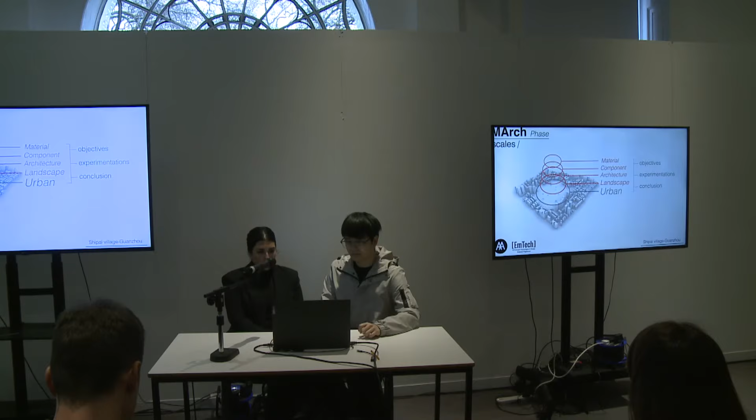Now in the MArch phase, the integrated system is introduced at more specific scales, starting with the urban scale. First of all, we removed all the poor quality buildings and kept only the buildings that had historical value.

The first way to insert agriculture was to use traditional agricultural farming, but we didn't have enough land for this purpose. Therefore, we decided to allocate only a number of desirable lands that receive appropriate sunlight hours as agricultural fields. Since traditional agriculture alone requires occupying a lot of land, we had to use modern agriculture methods to provide maximum residential space—a method that produces more products while occupying less land. This method is a type of vertical agriculture called hydroponic agriculture.

It only requires water, which is available in our climate. Therefore, collecting and storing water became our entry point for the formation of our urban strategies. In addition, due to material limitations and our commitment to sustainability, we avoided the construction of high-rise buildings.

Here are the urban objectives. In the first experiment, we ran a particle simulation on the mesh topography to analyze the flow of water across a surface. We reached several discrete curves, but the water collection system needs to be continuous.

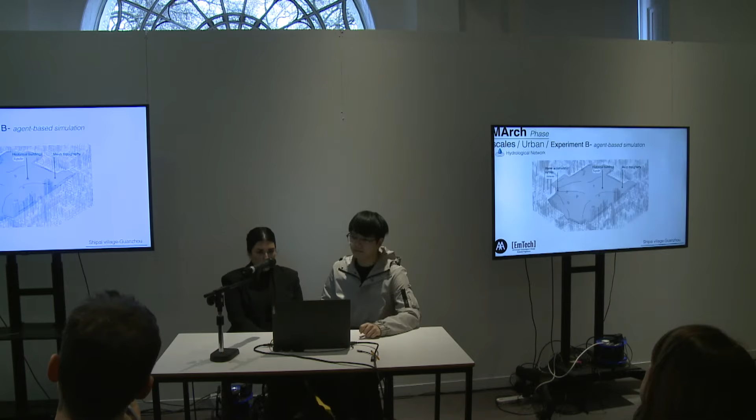Thus, in experiment B, in order to achieve a continuous water collection network, we ran an agent-based simulation with the random population of water particles on the topography mesh following the achieved curves from the previous stage. After reaching the result, we selected the edges that had stronger connections across the site. At the same time, they shaped a continuous network.

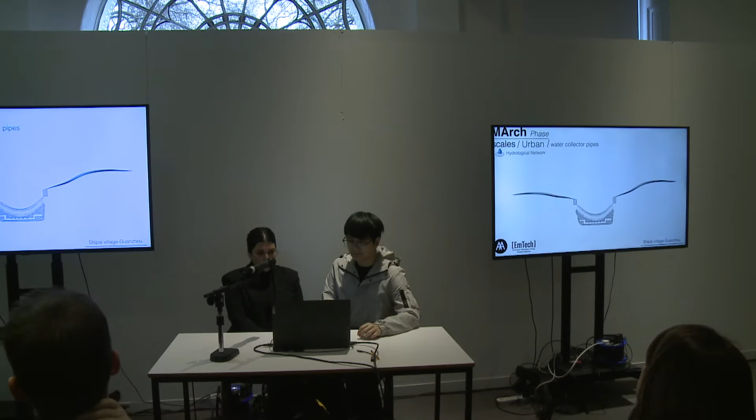In order to prevent water waste, permeable water collector pipes are located alongside the channel. In addition, designing an appropriate cross-section for the channels enables a better water navigation. For maximizing the water absorption, greeneries are defined across the channel.

In conclusion, the achieved hydro network divided the site into four main patches which shape the basis of defining other urban strategies. The achieved hydro network and its greenery spaces provide an appropriate platform to shape the pedestrian roads. Therefore, in this step, a design decision has been made to define the main pedestrian network parallel to the hydro network. In order to define the program allocation along the site, we did a terrain elevation mapping.

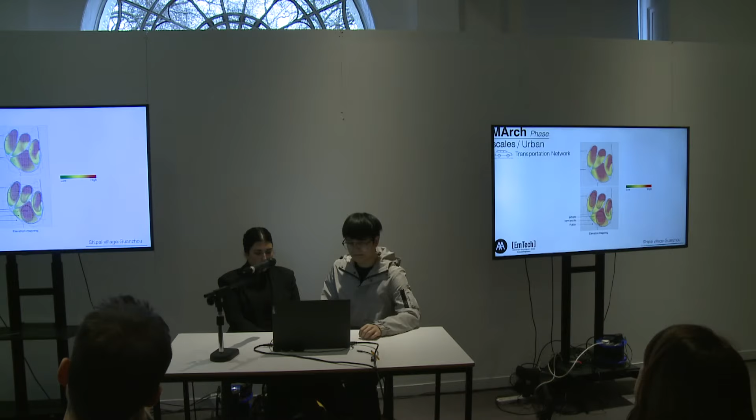This functional distribution brings the opportunity to define the transportation network in a circular arrangement inside each patch, which are connected to the important boundary streets and provide an appropriate accessibility to the site.

According to elevation mapping information, we selected the location of residential areas in high elevation parts for maximizing the view of the residential units, with semi-public functions and public spaces located from the center of each patch to the boundaries of the village respectively. These semi-public areas are mainly for hydroponic agriculture, and public areas are for public activities such as education, workshop, and leisure.

Landscape. The ambitions for designing the landscape or local scale are maximizing ventilation for a suitable response to hot and humid climates in hot seasons, spring and summer, maximizing appropriate sunlight hours for residential clustering in winter, and maximizing the amount of sunlight energy received in agricultural fields in winter.

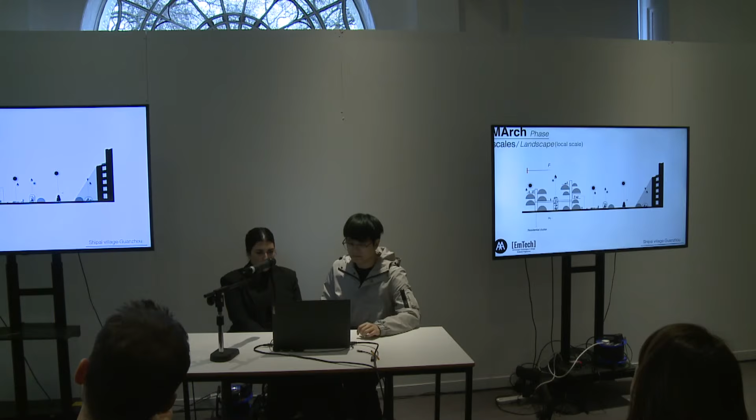In order to locate the programmatic functions on the local scale to achieve the mentioned objectives, it was important for us to define the morphology and aggregation of buildings including residential clusters, hydroponic agricultural buildings, and other public functions. Therefore, we set a GA optimization as our experimentation in this scale to optimize the landscape objectives.

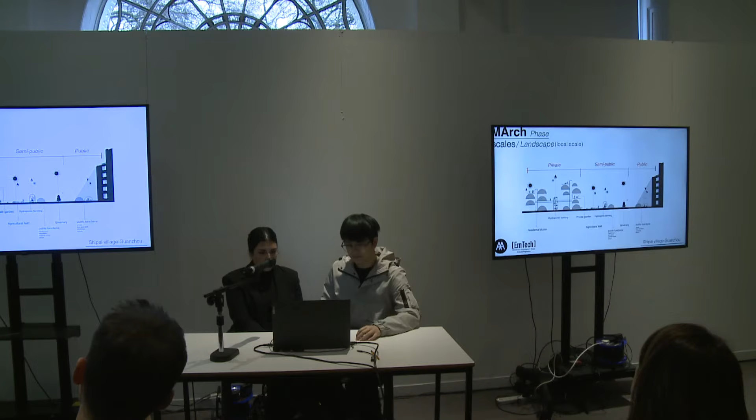As we investigated the traditional buildings in this region, we understood that the arrangement of mass and voids was circular due to environmental considerations. Therefore, with the help of a magnetic field tool, we set attractor and repeller points as our mass and void elements respectively. The next important step is to define the morphology of the mass in each zone.

100 generations, 50 individuals were run in the GA optimization. 50 Pareto solutions are selected from the individuals. Among them, individuals that met the average values in fitness criteria 1, 2, and 3 were selected as the basis for the following experimentations. At this stage of the work, with the information we had in progress from the rest of the project, we tried to draw a primitive picture of what we might reach at the end.

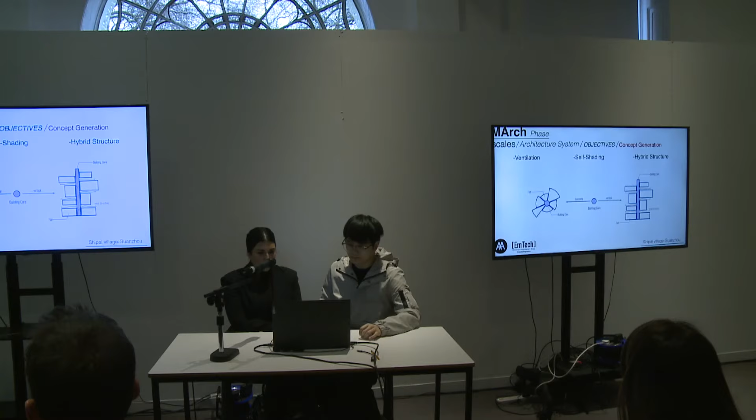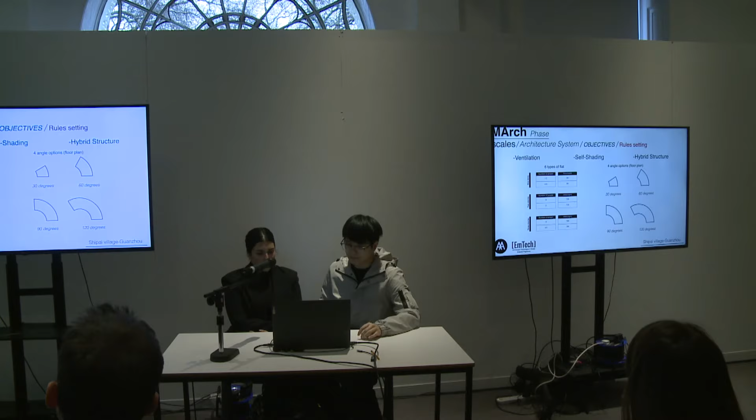After defining the basic concept, we did the overall frame structure of the building, with the columns and beams made entirely of timber. For the flat, we have summarized the 6 most common types of flats based on the fixed floor area and floor height. The angles of the flats varied between 30 degrees and 120 degrees in 30-degree intervals in order to fit the frame structure set in the previous step. Then we get the primitive geometry of the flat.

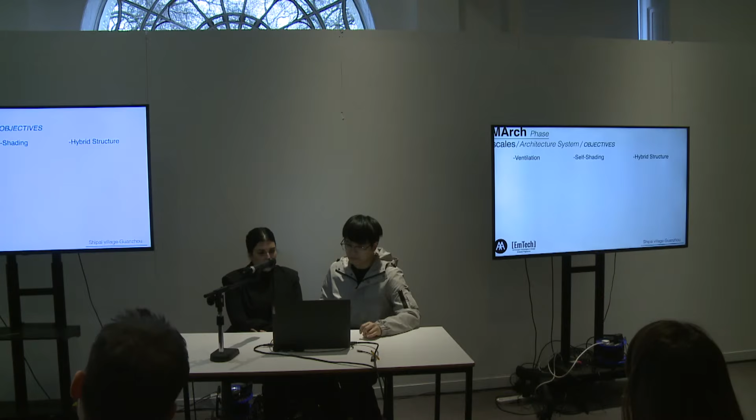For the morphology of the flats, we did form finding according to material and ventilation. The flats are mainly made of rammed earth, which is a typical compression-only structure. On the other hand, the Venturi effect was introduced to achieve natural ventilation. Based on these two aspects, we introduced the conical vault, which meets the needs of material and ventilation, and which can be understood as being formed by inner contour line and outer contour line.

In the next step, we run FEA on the 3 forms of vaults. By comparing the advantages and disadvantages for the inner contour line, we chose the third form of vault, where the forces on both sides will make the structure more stable, and for the outer contour line we chose the rounded board. So the morphology of the top of the flat is formed by these two types of the contour lines.

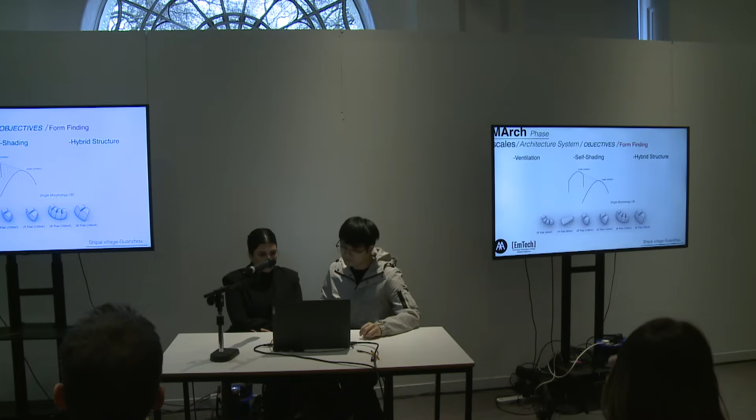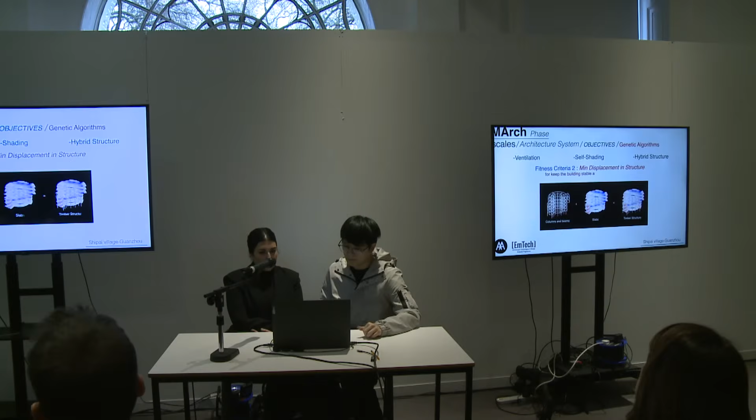In the aggregation setting, we set up two rules. One is all different types of the flats are interconnected around the core, and the other one is each flat is offset outward by a random distance. And the next step is the genetic algorithm. We have three fitness criteria. The first one is max self-shading in summer. The second one is minimum displacement in structure. The third one is max void space in the middle.

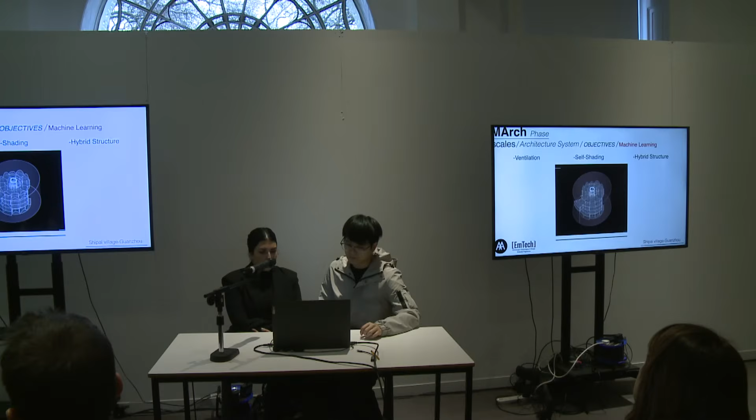After completing the genetic algorithm, we extracted the genes controlling the bounding box as the training input and used the other genes as the training output to perform the machine learning. In machine learning, by changing the bounding box, we get the corresponding building form. It provides us with a good start point. In the site analysis, we were given a number of such values. When we apply the machine learning to the site, it provides us with the specific building forms.

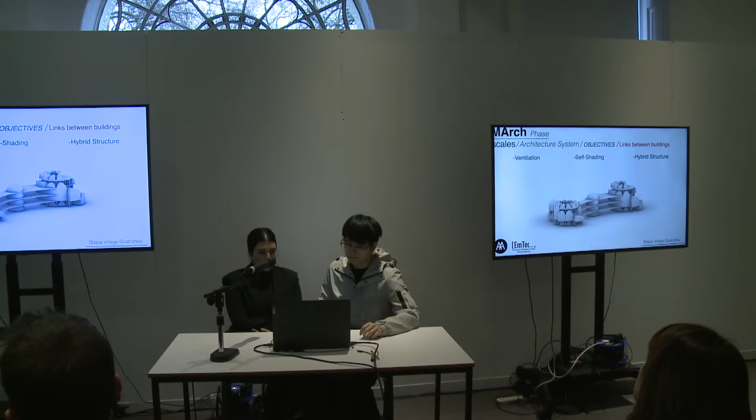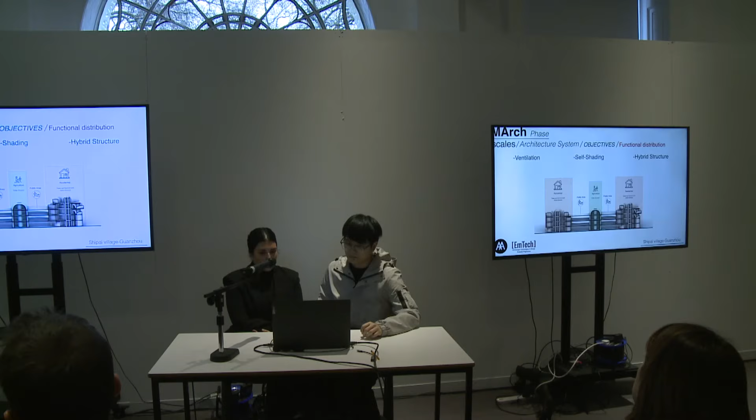In the next step, we connected some of the buildings on the site and created an agriculture area in the center of the connection. This agriculture area will be constructed from timber structures, which will also support the entire floor slab together with the structure of the residential buildings. Here is the construction detailing of hydroponic agricultural units.

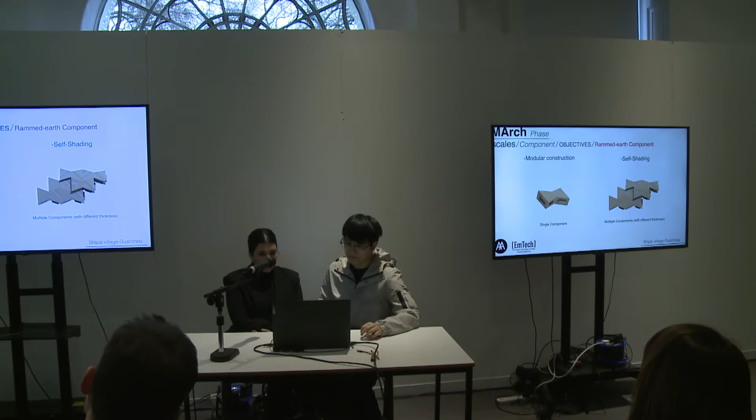For the construction detailing, there are two objectives. One is modular construction and one is self-shading. For the rammed earth components, each component consists of the slots and protrusions to allow interconnection between them. At the same time, the thickness gap between the components is used to provide the self-shading. And this is the detail of the vault components, and we can see how these slots and protrusions work together.

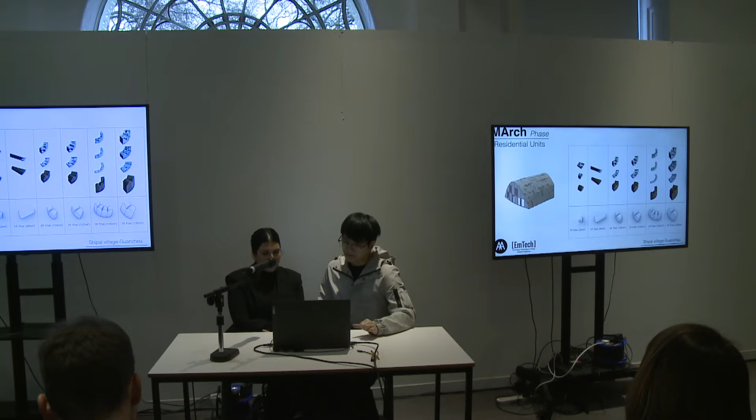This diagram shows the construction sequence, starting with the construction of the frame structure, followed by the assembly of the rammed earth modules in the flat units, then the installation of the timber frameworks and the sunshades in the flat units, and finally the construction of the rainwater collection roof.

A roof is attached to the top of residential buildings, which provides the possibility of collecting water in these units with the help of pipes. Part of the water is used by residential units and the other part is stored for agriculture. This roof is also used as insulation against rain.

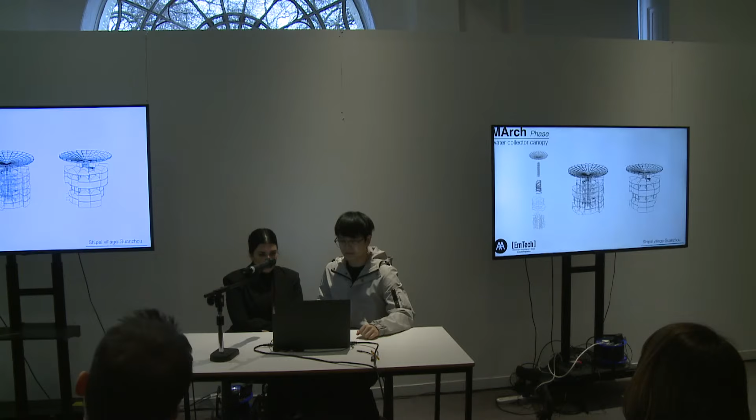The water collection system expresses the relationship between the urban scale and architecture. The beginning of the design started with the water collection system, and this image shows the different parts of our design, how we have arranged them together.

As a summary, we must say that it is not possible to provide enough housing units for all the previous residents, but this complex can provide a residential and economic platform so that with collective planning, all the previous residents can benefit financially from it, even those who cannot live in the new village. From an economic point of view, they can provide at least their needs in the city.

As mentioned, in addition to residential units, this complex has semi-private and public functions. Hydroponic greenhouses are suitable as workplaces for a number of resident members. Also, the produced products can be sold in public areas near the border of the village and the city.

Also, public spaces will be a possibility to hold regular workshops in order to share the experiences of villagers with city residents. This activity can also be a good source of income for village members. In addition, it provides the possibility of developing this sustainable experience to other parts of the city.

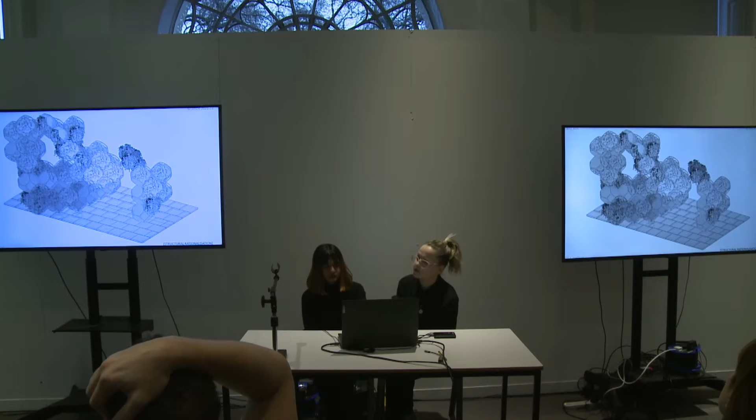And also there were certain structural limitations that needed to be rationalized on site when implementing so many modular pieces at the urban scale. So within the existing ground, whatever the cladding actually is, it is going to be retained in the process. So the footing locations are identified against a grid, so very easily we can map out 1 meter by 1 meter and identify where we're placing these. So the cladding is removed, the location is marked, the footing is placed, and then we cover the footing so that these interjections really are not disrupting the space as much as it would appear at this scale.

And so the modularity of the growth of the system also works to cover any unsightly things that we are hoping to hide as designers, while also trying to acknowledge our site. So for example, draining back gray water collection into the existing storm runoff management.

Further architectural detailing was conducted for the collection pods in Soho Square. The first pod was the algae collection pod, which was designed as a user interactive space where the users could be invited to participate with this morphology. The first participation was in community building, where people could get together to assemble these biobots to facilitate the environment.

The algae module again has a timeline, which is an assembly timeline of 15 to 30 minutes per module, and replacement every 15 days. The algae circulation has to be conducted every 1 hour in order to receive maximum sunlight. The moss growth occurs over 2 months, and the timber sponge decay occurs over 2 years. The first indication happens through the first cycle, transmitted through signals to the users in order to generate electricity.

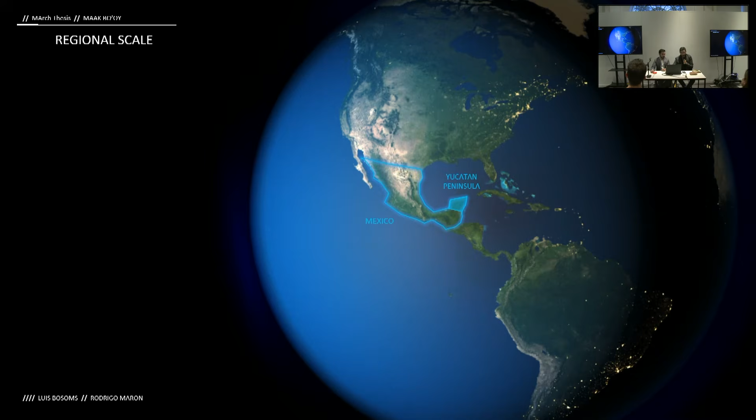We chose our area of study in Mexico, specifically in the Yucatan Peninsula. The Yucatan Peninsula is divided between 3 states: Quintana Roo, Yucatan, and Campeche. Yucatan would be the state where we were conducting most of our research, since it has the highest Mayan population of the 3. We conducted a whole analysis overlaying different maps, but the most important one would probably be the flood zones and high-risk zones.

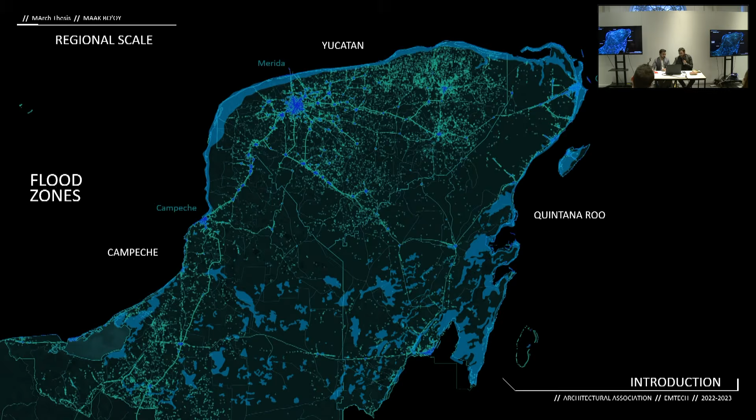With this, we started looking into the Mayan culture, specifically their architectural typologies. This typology begins in the Mayan plot, or the solar. The solar has different functions, which are all arranged around the solar and are all correlated based on distances from one function to the other.

The apsidal forms are all oriented facing the predominant wind directions, ensuring that when we start studying this plot through a CFD analysis, we can see how the location of different trees mitigates and diffuses wind flow, while the house's form allows for wind channels to happen, allowing for cross ventilation throughout the whole plot. With this, we started looking at a typical Mayan house.

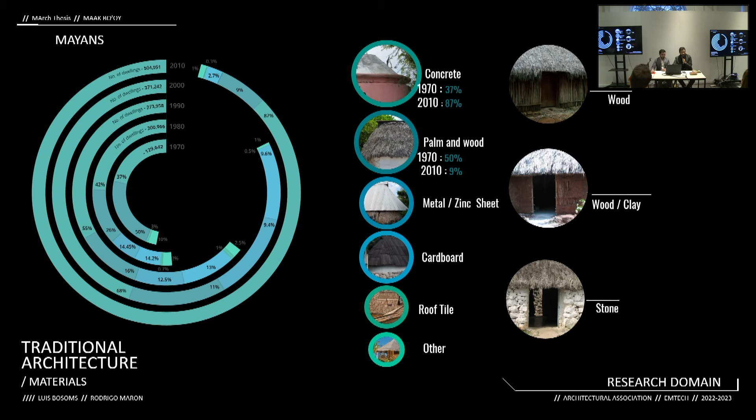These houses are constructed primarily out of 3 materials, which are wood, clay, or stone, and they have a great canopy system, which throughout the years has been losing the main natural materials needed to construct it, so it's being replaced by more concrete materials. Inside, it's an open space plan with an emphasis on the hammock, as the hammock rules this whole space.

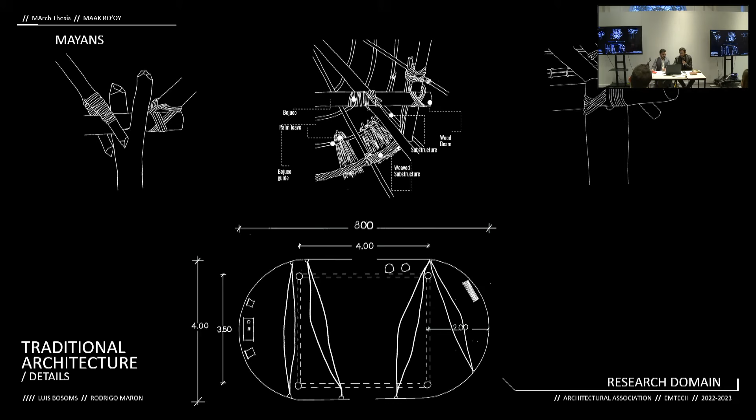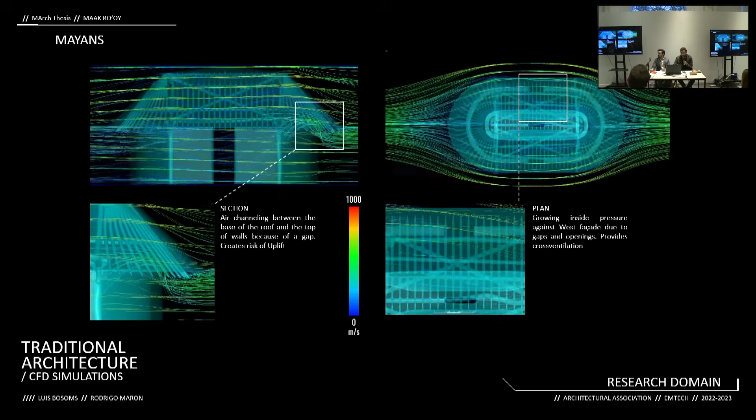The design follows a 2-to-1 ratio with a timber structure, with a main timber structure attached to a secondary timber structure, where the roof and canopy are attached using bejuco of natural fibers and knots. We can see through a CFD how this system works great for cross-ventilation and for cooling down this house in this extremely hot climate, but in storm conditions it can produce an uplift force which will blow off the roof, resulting in high damages during storms.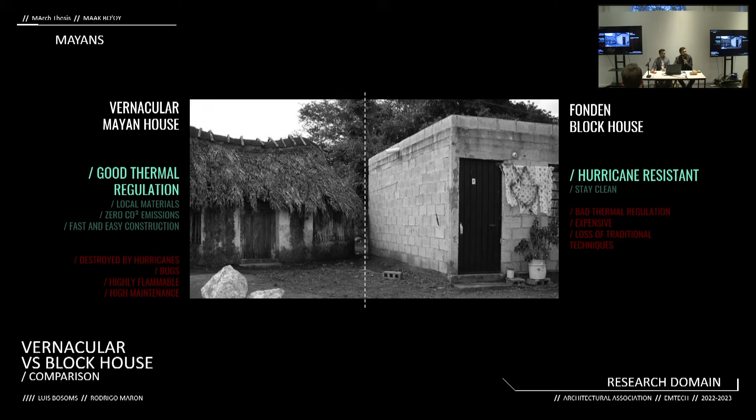These houses, although hurricane resistant due to this concrete material, lack all of the thermal regulation and local materials that make the traditional house so good. Therefore, normally after the storm, when they have time, via a community construction sequence, they end up rebuilding their houses right next to the block house given to them by the government.

Based on this, we started working on a multi-scalar approach, where we work in 5 different scales: landscape, material, morphology, microurbanism, and network. Let's take a look at the first 2 scales, which are material and morphology. For the morphology, in the MSc stage, we ran a first evolutionary algorithm to create a general morphology. From there, a large deformation analysis was conducted to extract and select the stress lines, which were then rationalized, and lastly, a sequential evolutionary algorithm was run to define the structure, ending up with this result.

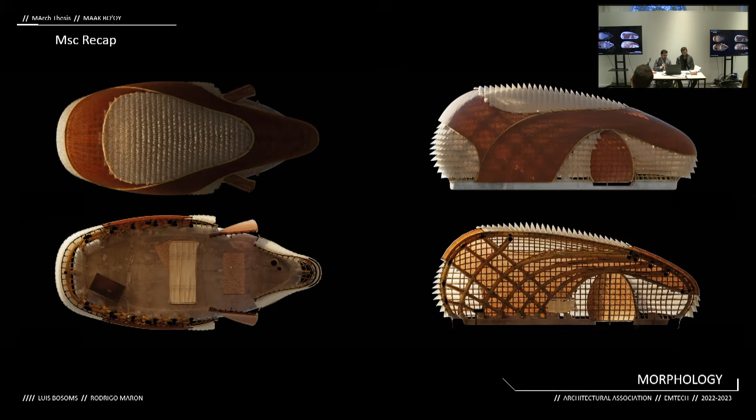However, we were missing a link between the first and the second evolutionary algorithm in the way we were extracting the stress lines. So we decided to take a few steps back and study an alternative solution in the way we were getting the structure. We extracted the mesh from the first evolutionary algorithm, and from there we applied the loads of gravity and wind in a category 5 scenario.

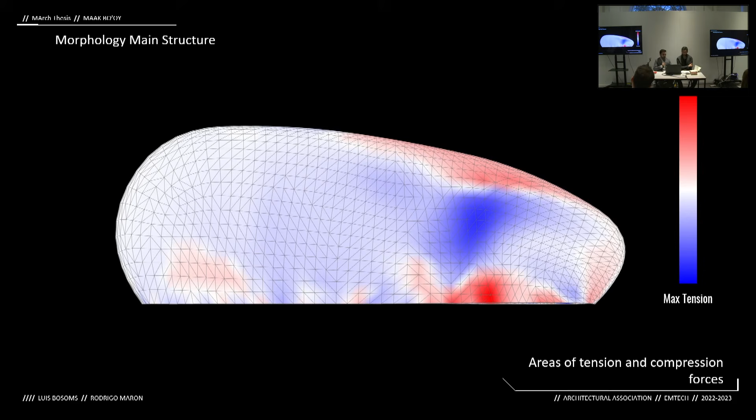Then we started looking at a shell analysis, looking into the maximum areas of compression and tension forces, studying it in the inner and the outer layer of the mesh, reducing the mesh to only have the maximum areas of compression and tension, and then extracting the principal stress lines in direction 1 and direction 2.

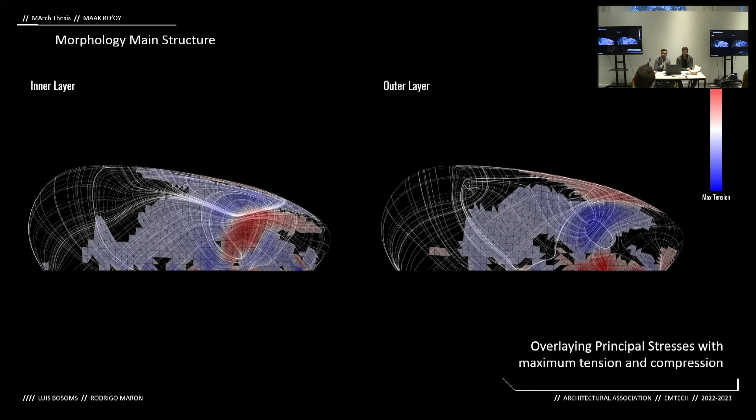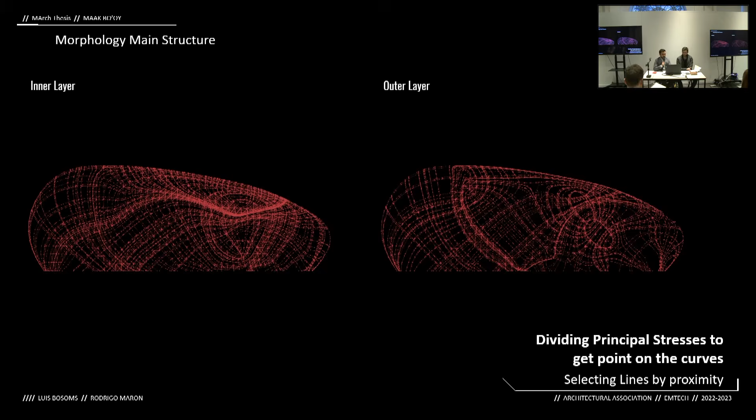We overlaid that with the maximum tension and compression areas, selecting these lines by proximity, measuring the lines against the mesh, and dispatching them accordingly in direction 1 and direction 2. Furthermore, we overlapped them again and did a second dispatch by the length of the lines, and a last dispatch by the closeness of the lines, ending up with these two sets of lines in the inner and outer layer.

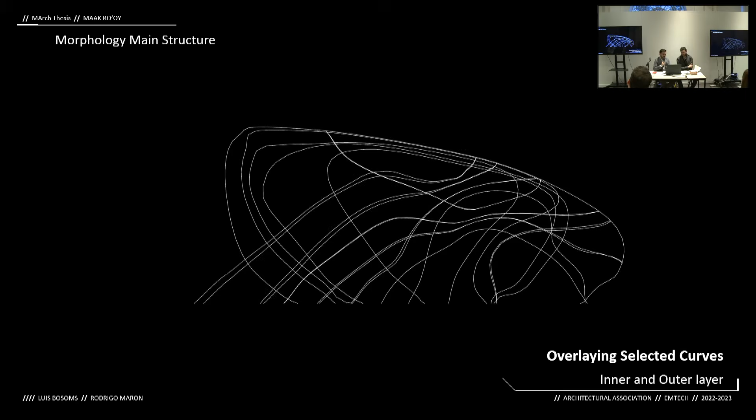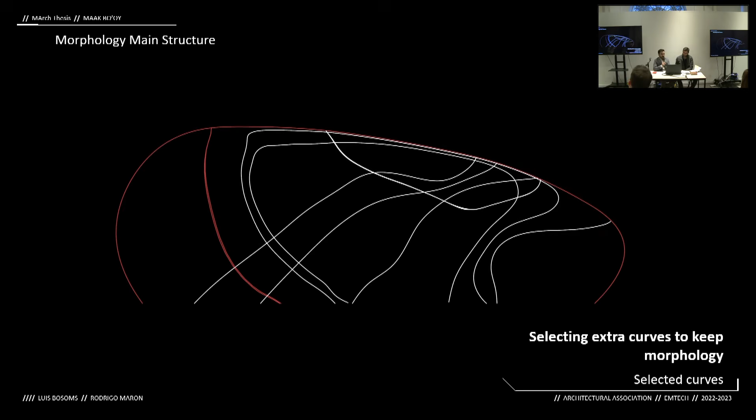When we overlaid them again, by construction criteria, we started selecting the ones that were not overlapping each other, overlaid them again with the areas of maximum tension and compression forces, and finally we had to add a few more lines in order to keep the morphology we were working with. Then we rationalized these lines in the elastica domain of the bamboo to have this final skeleton, which would then further run a finite element analysis in order to test this structure in a worst case scenario, again, a category 5.

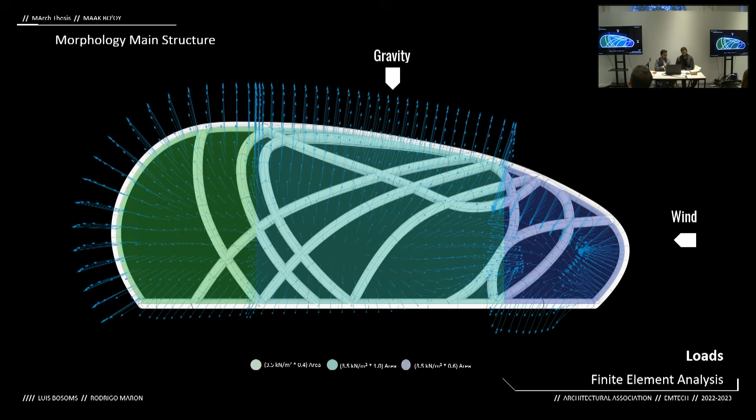Bamboo has the tensile strength of steel, allowing for elastic deformations. So for the digital experiments, we created a material with the real values of the mechanical properties of the bamboo in order to have more accurate results.

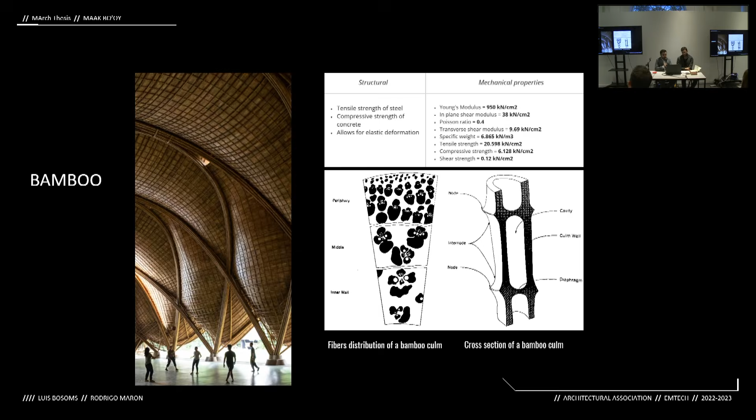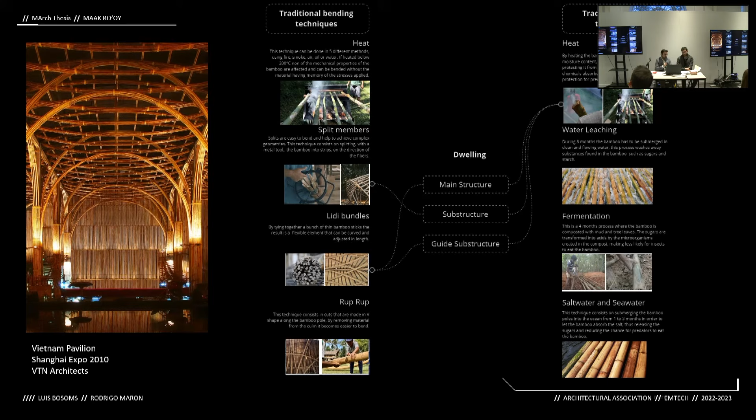On the MSc stage, the main structure was proposed as heat-bended single bamboos. However, the change in the design of the structure made us rethink the construction process. Bundling showed to be a better construction method for this complex geometry since it allows for redundancy and it's easier to bend. So we started looking into the best pattern for this bundling we were working with.

So we decided to make an evolutionary algorithm, which was optimizing for 3 fitness criteria: minimizing the displacement, maximizing the number of poles, and minimizing the mass. Here are some of the Pareto front solutions.

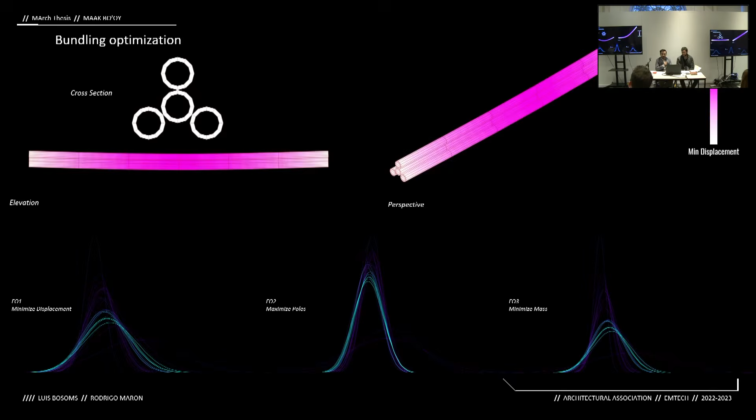Then we started analyzing individually for each one of the criteria, where we were seeing that if it was performing good for one, it wasn't performing that well for the other. So we decided to go for one individual that was performing good for all 3 fitness criteria proposed, and compare that to the solution we had before of a single pole.

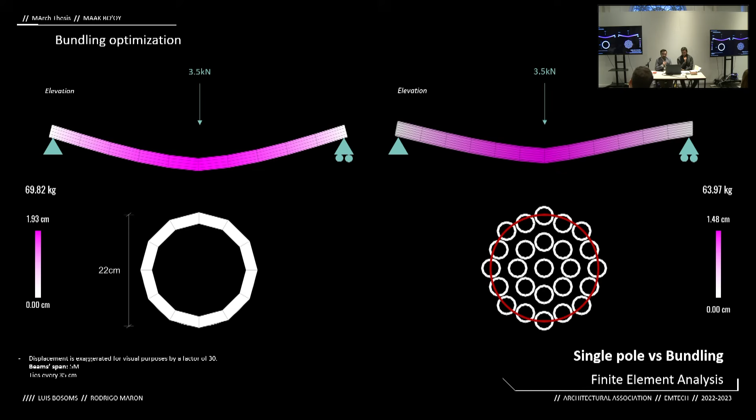We can see that with the bundling, we are having less displacement and it's a lighter structure as well. We then compared this and ran a physical test in order to have a comparison between the physical and the digital model, where we can see that for a load of 27 kilos, we are having a similar displacement for both, that is less than 4 centimeters.

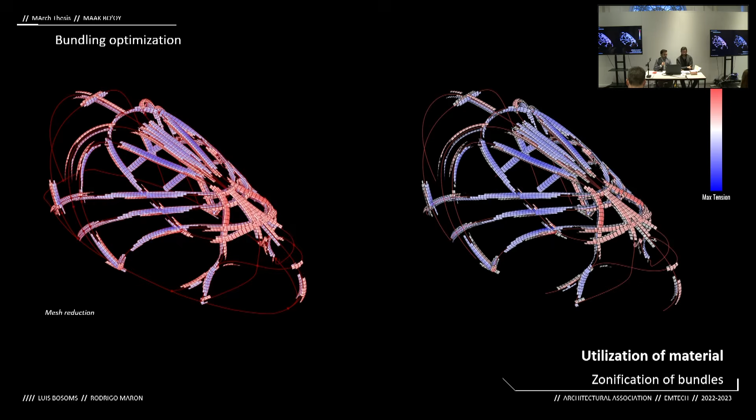Then we tried to optimize the amount of material we were using in this skeleton, so we mapped again the areas of maximum compression and maximum tension forces in the skeleton, and defined different zones for 2 types of bundling, a big bundle and a small bundle accordingly, which are going to be connected with a simple overlap of each other and tied together.

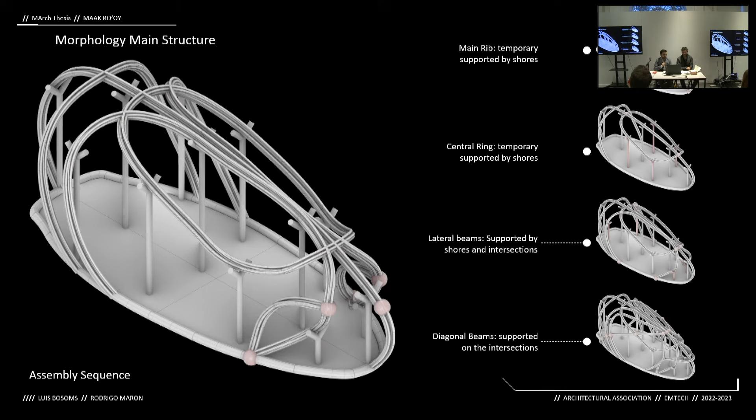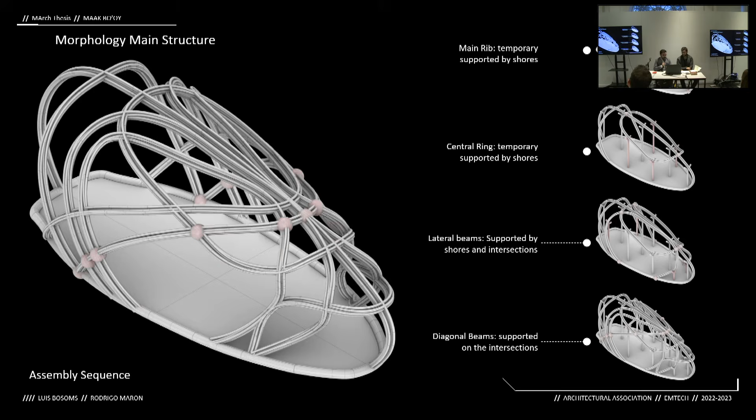We then started looking into the assembly sequence of this new structure, where the bundling will take place at the bamboo workshop and be assembled directly on site, starting with the main rib and the central ring, which will be temporarily supported by shores. Afterwards, the intersections and the rest of the beams will be measured and marked in order to attach the beams to each intersection. Once the structural stability is achieved, the shores are removed and the rest of the structure is put in place.

During the MSc stages, we designed a joint to connect this structure to the foundation we were having, and clearly with the changes in the structural system we were having, we needed to redesign this joint. So we made changes to the node, moving from a fixed joint to an articulated joint, which will allow for easier construction methods.

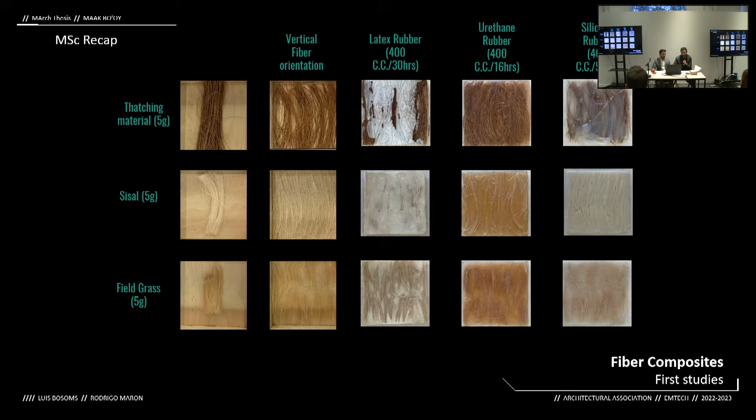Also during the MSc stage, we were looking at different material composites, different palms and fiber, and different palms and latex or rubber composites, trying to create a new material that could have the same properties as the palm but at a cheaper, more affordable price. We chose Henequen as our fiber due to its historical background in the region, its clear availability, its usage throughout the years, and its great properties.

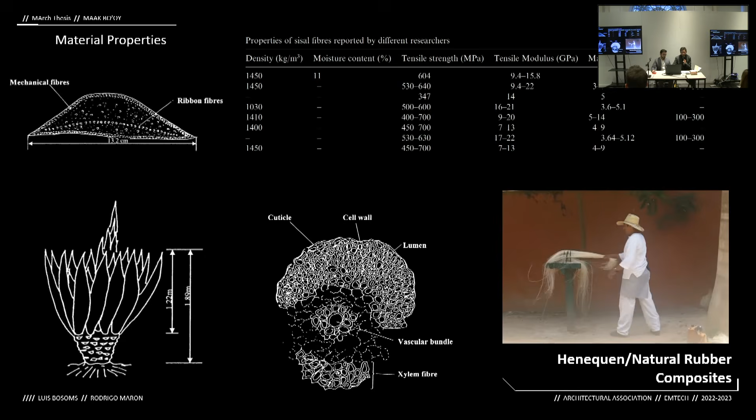With this and some research, we were able to develop 4 different material composites, each with differential proportions of latex, fibers, and thickener. These were all measured in different ways in order for us to digitally recreate this material, so we could continue to measure other things we couldn't physically measure, such as their translucent properties.

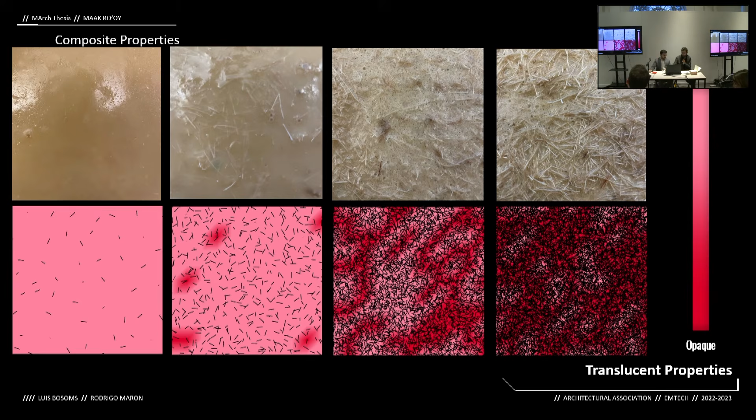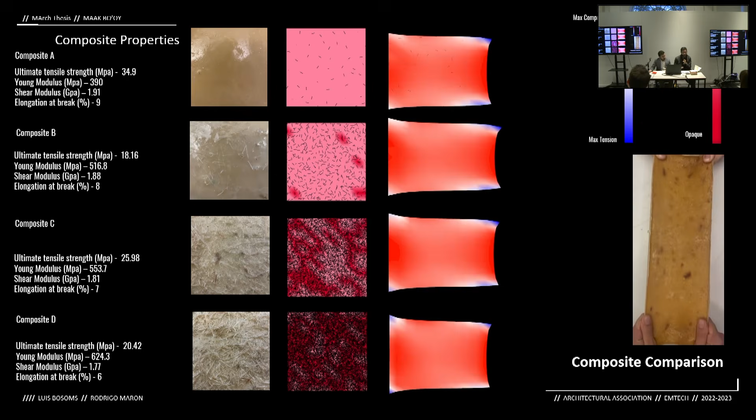The materials were then tested physically for elastic behavior as well as for air loads being pushed, and these were all compared and divided between the 4 different composites, which allowed us to start choosing in which areas of the structure each composite was going to be added, depending on translucent properties as well as ventilation properties we were seeking.

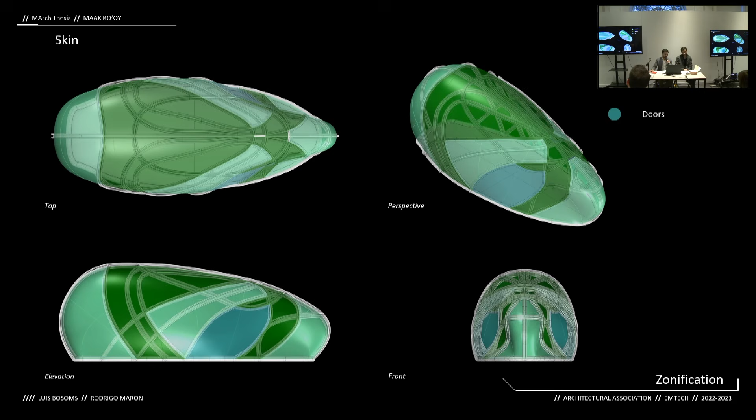From there, we started dividing the skin into 2 different parts of panels: the breathable panels and the solid panels, and started designing a substructure which makes sense with the structure we were having and the skin we were developing. So we decided to have quad panels.

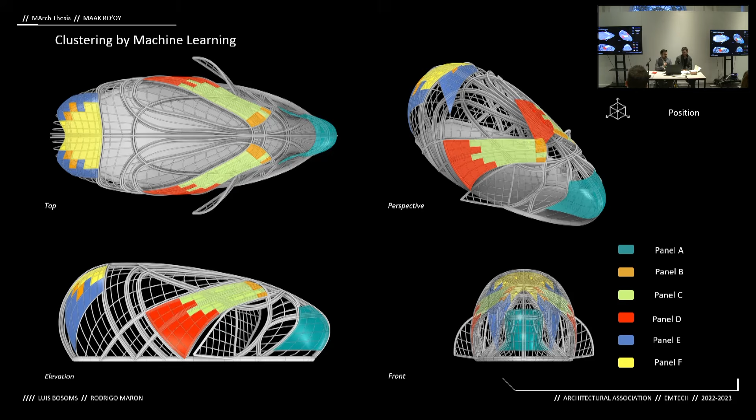In the breathable skin, we started making a clustering with 5 different parameters: perimeter, area, length, the angle of the segments, and the position, ending up with 6 different types of panels, which we would further rationalize in order to have an average panel for each one and a single mold.

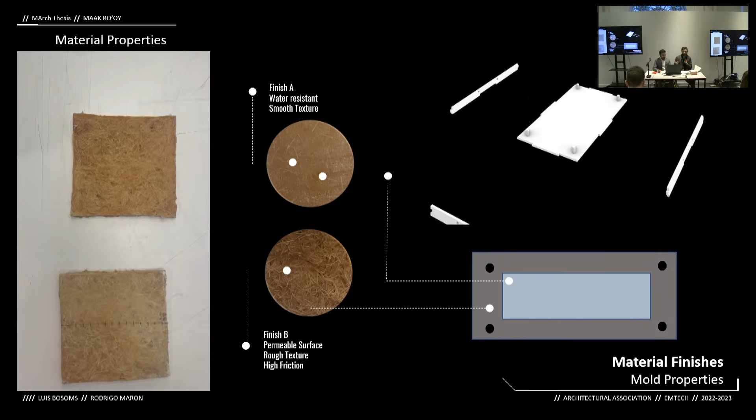To design this mold, we went back to what we were learning from our material experiments, noticing that the way we were creating these composites ended with 2 distinct finishes. Finish A was a very smooth, water-resistant texture, while finish B provided a lot of friction when overlapped with each other. So we decided to design a mold that could allow for an edge of this high-friction finish while having the center be a smooth finish, allowing the panels to overlap and move less during a storm.

With this, we started looking at how these overlaps would allow for ventilation, and especially how it would attach to the main structure. Through a simple system of a screw top, a panel scaling, and then a bottom, this is all managed to attach to the main structure.

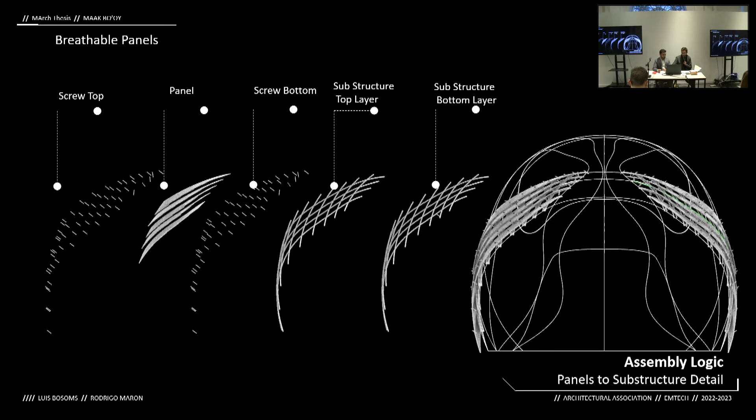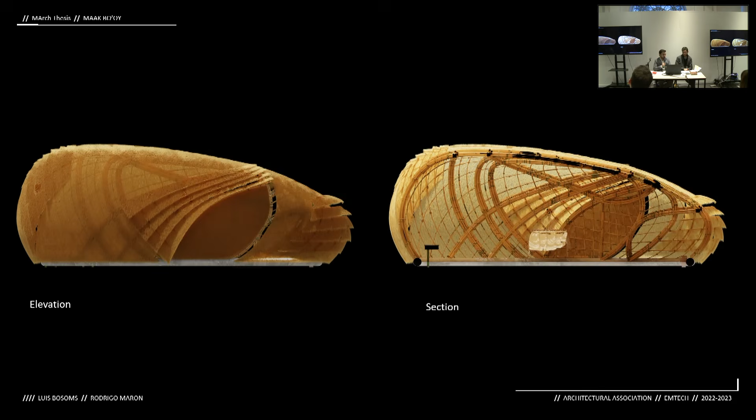Then we have a top view of the dwelling with an open floor plan, as well as an elevation and a section, and an inside view where we can see that the overlapping allows for ventilation and the translucent properties of the panels.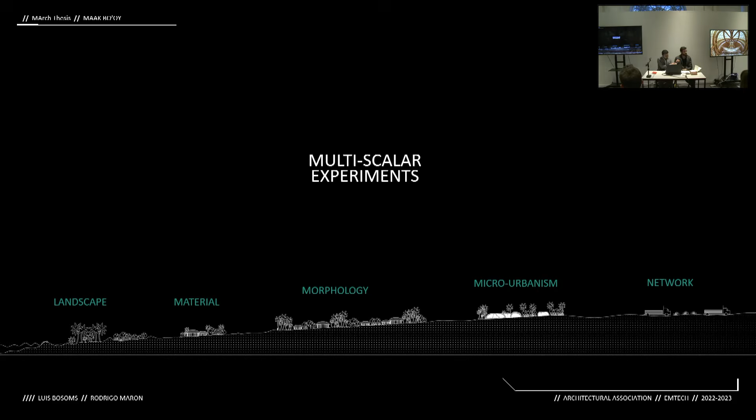We then started working at the 3 remaining scales. We began looking at landscape, microurban, and finally a network.

As a recap of what we had done in MSc, we created a flora catalog. These species of plants each had properties which made them great for storm resistance, as well as economic and cultural properties which would make it easier for people to grow these plants.

We then tested these plants in different arrangements, and how their porosity levels could help mitigate wind forces and protect different elements from the storms. With these conclusions in mind, we went back to the Solar and into this radial organization, adding 3 distinct rings of protection to be filled with landscape around the plot.

With this, we created a multi-objective optimization algorithm that could optimize based on different criteria based on the plot. To develop this, we came up with 3 distinct communal typologies.

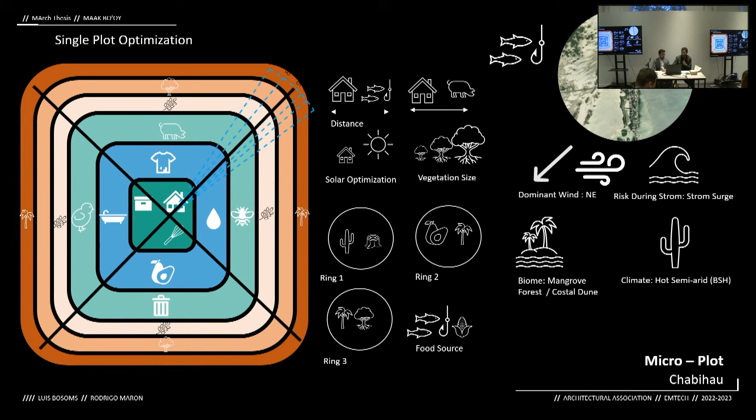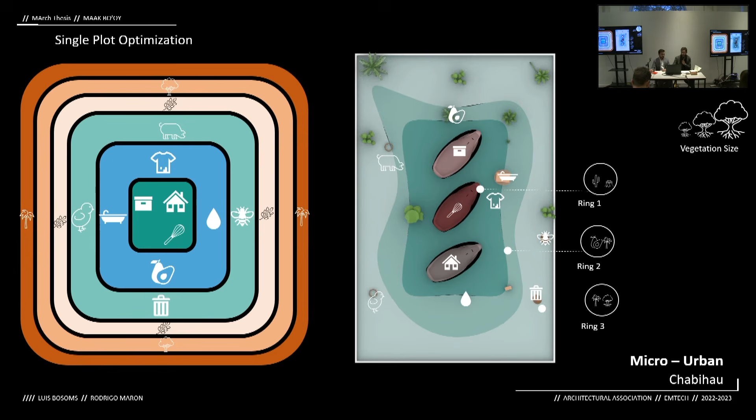We'll start with Chabihau, a coastal town located to the north of the state. This town's main economic gain is from fishing, and we can see the individual plots reflecting that, with landscape producing mostly cacti and palms, and a very small rectangular plot with a lot of emphasis on closeness to the sea.

As we said, an evolutionary algorithm was created to produce a variation of different types of plots. These were each analyzed on their specific properties. For fitness criteria 1, distances, the best-ranking plot has the trees away from the houses, allowing for less damage during storms.

Or when looking at solar optimization, where we want more solar shading on these functions, they're clearly all covered with a small jungle of palms.

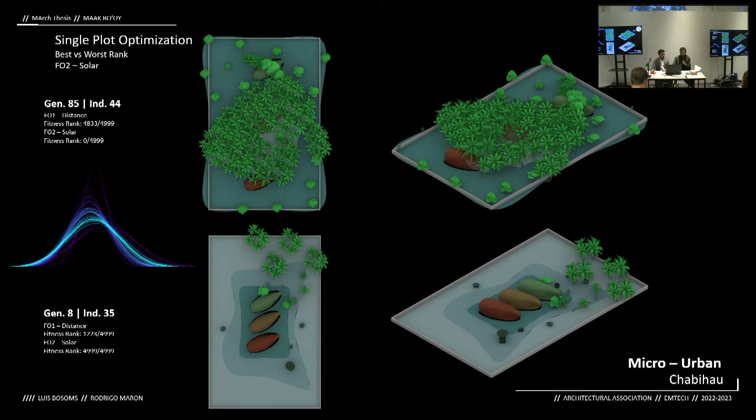Afterwards, we began working on a typology on an urban level. We began by creating agent-based simulations based on the predominant wind factors as well as around the milpas to work as agent spawn points. These agents' trails were then recorded into a mesh, which allowed us to create a terrain based on different typologies.

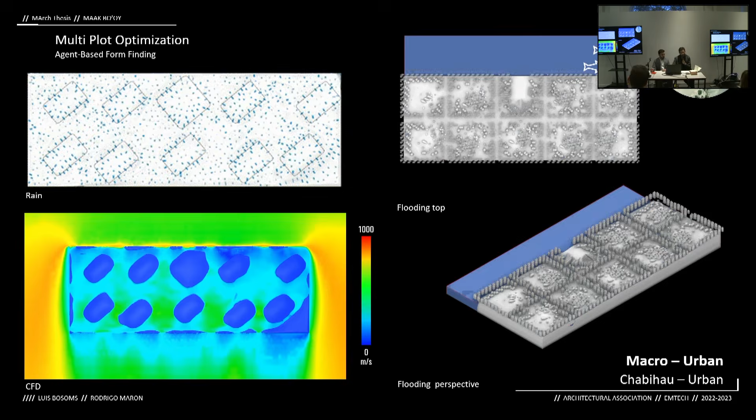Before we moved on, we tested this terrain to see if it was working in wind, rain, and flooding conditions. When satisfied, we began a sequential simulation of an urban layout, where the first simulation was run on individual plots, and then we had the urban layout of the town optimizing for our basic criteria.

We were looking for more bamboo for construction, more agave to provide fibers for biocomposites, and a bigger and better protected safe area from the storm.

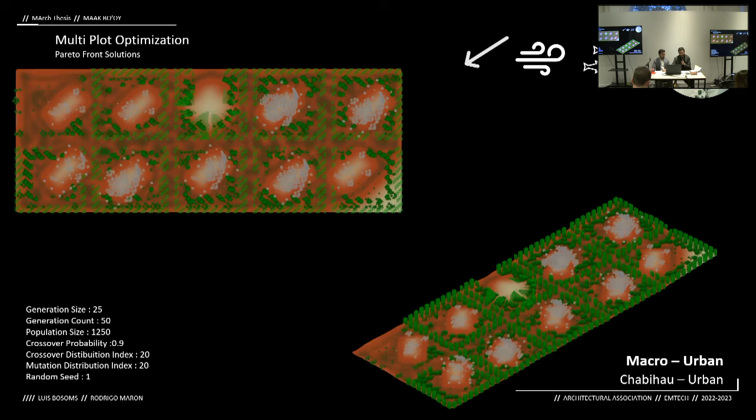We can see the Pareto front solutions here, showing some real morphological differences. When analyzing the best and worst categories, we can see for bamboo a very marked perimeter around the individual plots, providing great protection. The agave is the opposite of this, and in the safe area we can see a big, well-protected central milpa.

We then started looking at another typical typology of the Yucatan: the town of Chapab. Chapab is located in the South Hilly region, and it's a town that focuses mostly on agriculture, so its plot obviously reflects this, with the inclusion of a small family milpa to produce some food for themselves and others to sell.

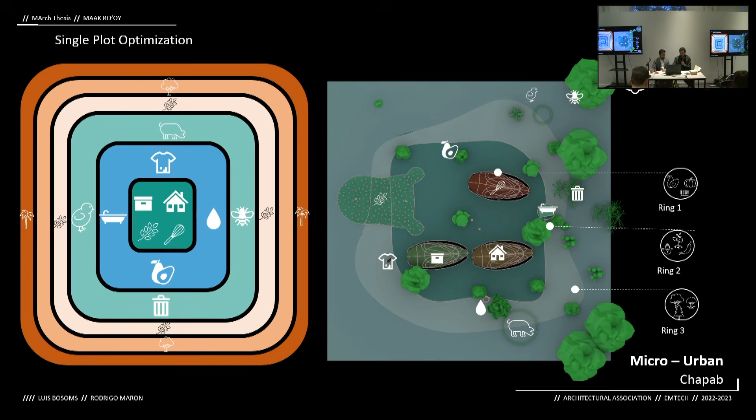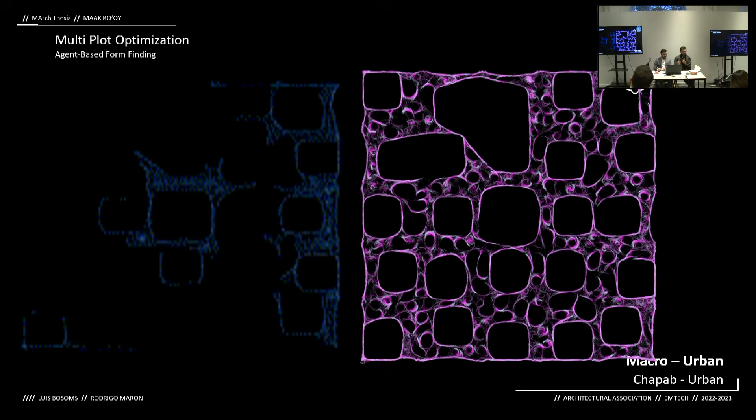Based on this, a new fitness objective was added, where we wanted the biggest and better milpa area. After running the GA, we limited the Pareto front solutions and began working into the topography, following the same process as before, with an agent-based system to create a mesh. This topological mesh was then analyzed through CFD, rain simulations, and flooding simulations, and once satisfied with the results, it was run through a sequential simulation again.

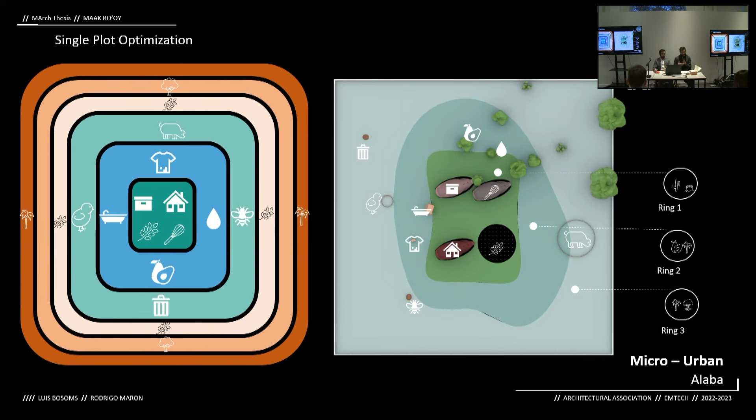Lastly, we started looking at another typology located in the central parts of the state, which is Alaba. Alaba is a town whose economic gain mostly comes from animal husbandry, so animals take on a specific importance in the plot. When we look at it, it's quite similar to the last plot, also having a milpa, but with bigger areas for animals.

We again went through this whole system, optimizing this plot based on most area, the best distances, and the best solar gains, and the Pareto front solutions were recorded and limited for the sequential simulation. We ran an agent-based system again, this time based around the plot and the predominant wind direction. The trails were outputted into the mesh, and this mesh was tested through the same processes before being run through a sequential simulation again, optimizing for the highest bamboo area, the most agave or materials, and the best safe zone possible.

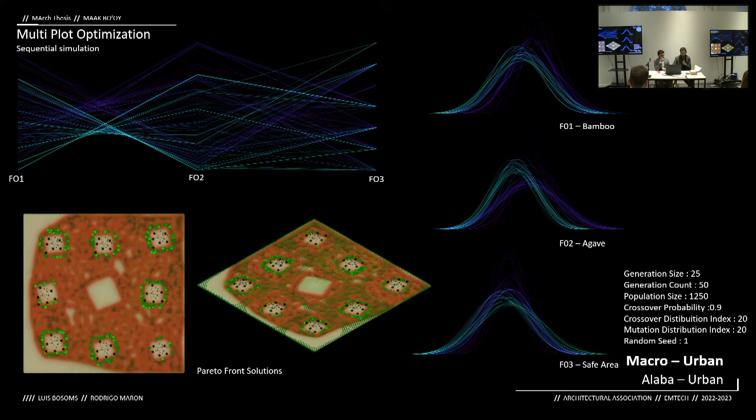Afterwards, we started looking at the evacuation network. Currently, the evacuation network in place is run by the government and the municipalities, and it's very limited. It mostly focuses on the northern communities of the state, which face storm surge risks, and the distances they need to travel are quite long, so we started to rethink this.

We began by selecting all of the Mayan settlements in the state and limiting them to the state of Yucatan. Then we limited those to the communities that weren't close enough to an already located urban area where they could evacuate to. Through a process of k-means clustering, we developed 20 different clusters responding to each of the municipalities in the state so they could organize the evacuation.

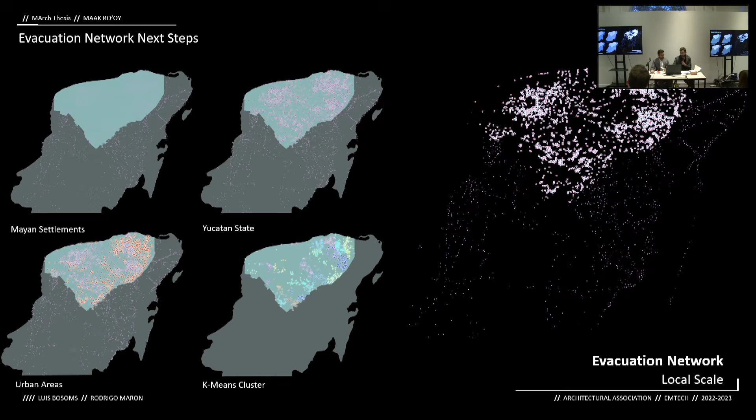Afterwards, these new safe points were identified, and a multi-objective optimization was done in order to locate the best location for these safe zones, optimizing for the maximum settlements in reach of each safe zone, the minimum travel distance to the safe zone, the most communities connected within this network, and finally having the least amount of safe zones located within the network.

To wrap everything up, we started looking into the life cycle of the whole project at different scales, naming the different activities throughout the life cycle, which are planting, harvesting, treating, prefabrication, storage, construction, evacuation, and finally reconstruction. We started to see how the different scales relate to each of these activities, and to sum up, we have a completely integrated, resilient program for the Mayans during a hurricane.

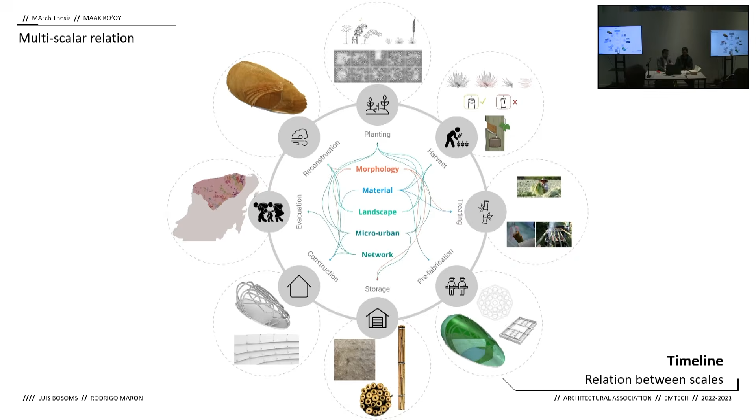I think it's a fascinating project, and I think it's got a level of resolution to it which is very rich, so I congratulate you on that. Some of the imagery, like this one, is spectacular.

What I'd like to understand a bit more, and I think I might have asked you this before, is who is building this? If you think about the current vernacular, what you've got there is fairly rudimentary, through well-established construction processes that they understand and are well versed in. I appreciate that as part of your construction process you've put in place, you talk about the panels, you've made them as repeatable as possible, so that's fairly good. But you've got these crazy, beautiful, but also crazy complex kind of bamboo structures that somehow need to be set out on site.

I can imagine if that was to be built in the UK, there'd be a thousand laser scans, points everywhere, people doing GPS all over the place just to try and get it in the right place. How is that going to be done en masse?